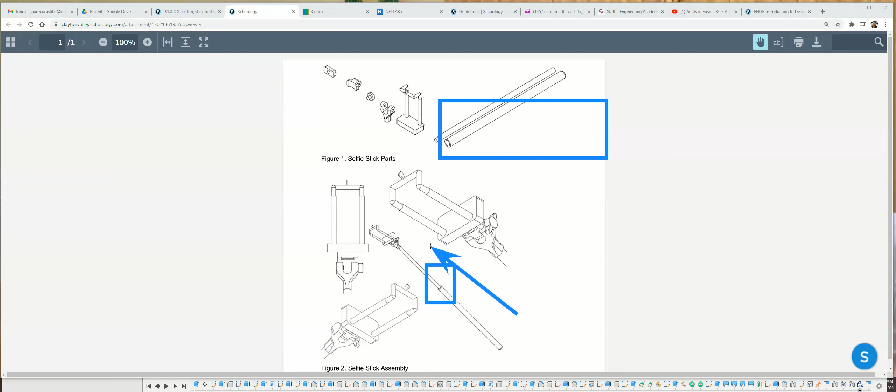Okay, in this video I'm going to show you how to do assignment 2.1.3C. We're going to continue assembling the selfie stick, but this time we're going to assemble the stick top and bottom. We're going to assemble these two parts here, and we're also going to introduce the slider joint where the stick top and bottom will slide. We're going to introduce the slide joint constraint for this assignment. So let's go ahead and get started.

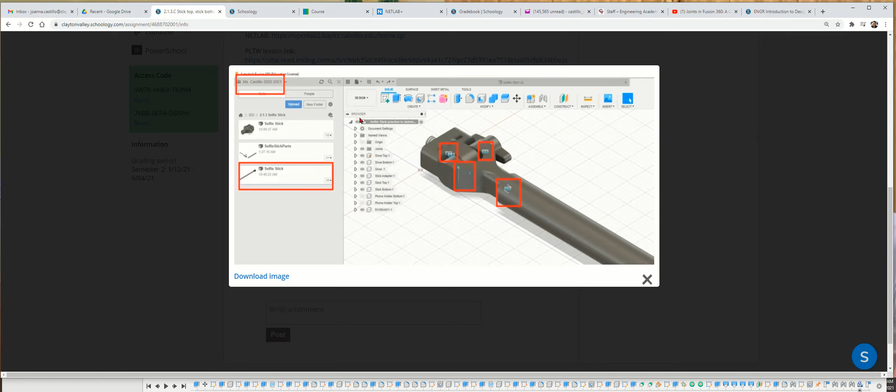There we go, here's the assignment. You're going to screenshot this. I want to see all these joints, right? Here's the slider joint, here's the rigid joint, here's the thumb screw joint, here's the rotate, and here are the two joints for the top, the shoe assembly. I want to see that you saved your selfie stick and I see your name in the data panel. So again, let's go ahead and get started.

So here's our Fusion file. Oh, this is the after picture, this is what we're going to see afterwards. I'm going to click on the one that we're going to continue. So here we are, continuing off on the last one, we just added the thumb screw and then rotated the stick adapter up flat on the plane, 90 degrees this way.

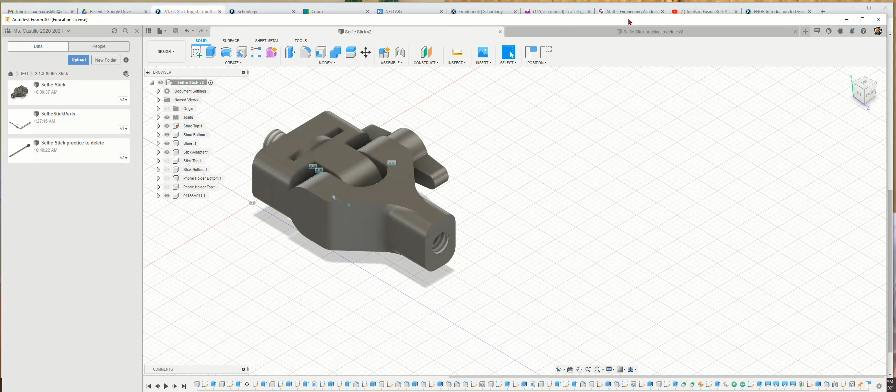So now we're going to go ahead and add the stick bottom and stick top. I'm going to go ahead and show it. Click on the eye, go back in, where are they? There, let's bring it a little closer. All right, there you go.

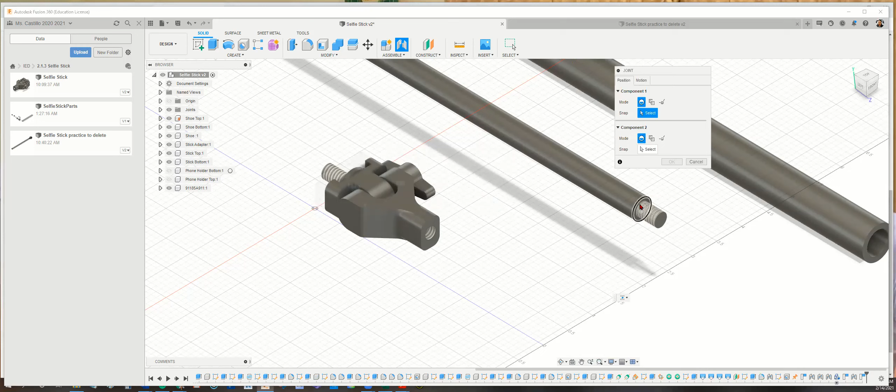Okay, so we're going to go ahead and attach those. Same thing, we're going to attach the stick top, clicking on this face onto the face of the hole of the stick adapter here. So we're going to go from here to here. That's the first thing we're going to do. So again, we're going to go to Assemble, click on Joint, capture position. I'm going to click on the edge right here, and then I'm going to click on the face of the stick adapter right there. Okay, and obviously that's backwards, so I'm going to go ahead and flip, and we're going to click on the motion tab to make it a rigid joint type. All right, so there's the stick adapter top.

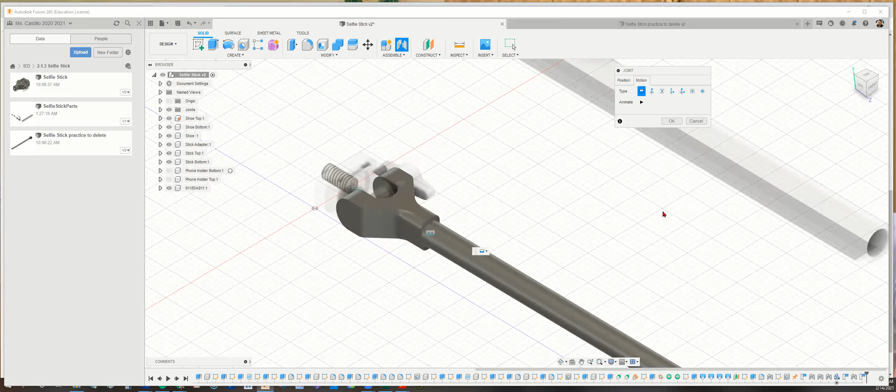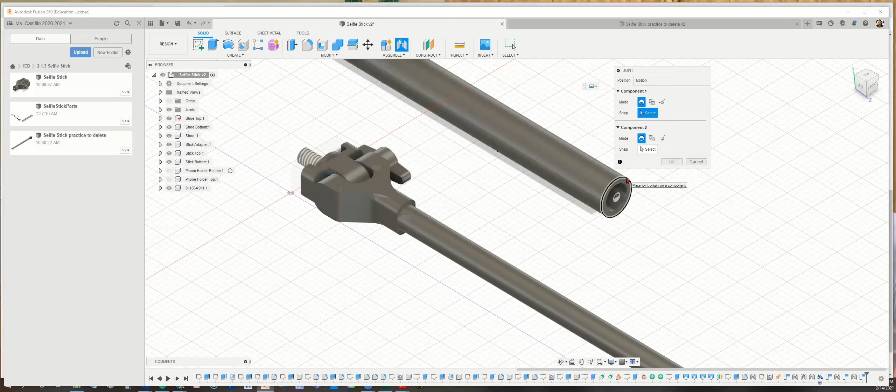Hit okay, so now we're going to go ahead and move the bottom. I'm going to click on this edge here. Let's see, I'll click on this edge here. This one here, let's try both, we have an inside edge and outside edge of the face. We're going to click on this edge here, going onto the edge of the stick top, okay? So again, we're going to go Assemble, hit Joint, capture position. I'm going to click on the edge here, and then look for the edge right there. See that moves? Okay, so obviously it's backwards, so I'm going to hit flip.

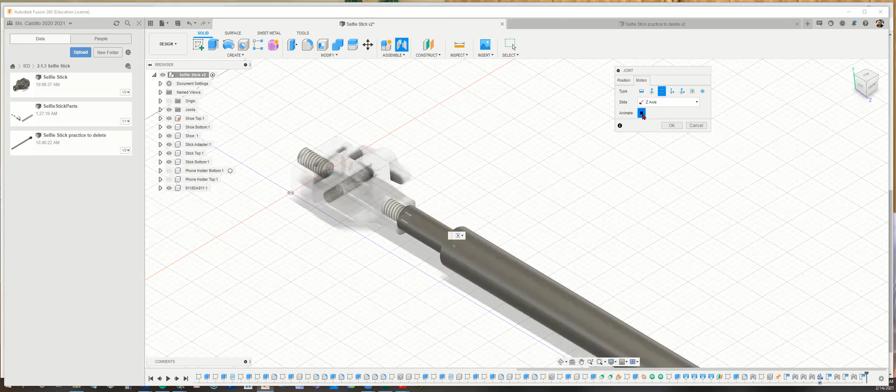And this time I'm going to go to the motion tab and click on the slider joint constraint. See, that's going to go back and forth. If I click on the animate button again, obviously it's not going to go all the way up and down like that, so we're going to go change the joint itself. So I'm going to hit OK.

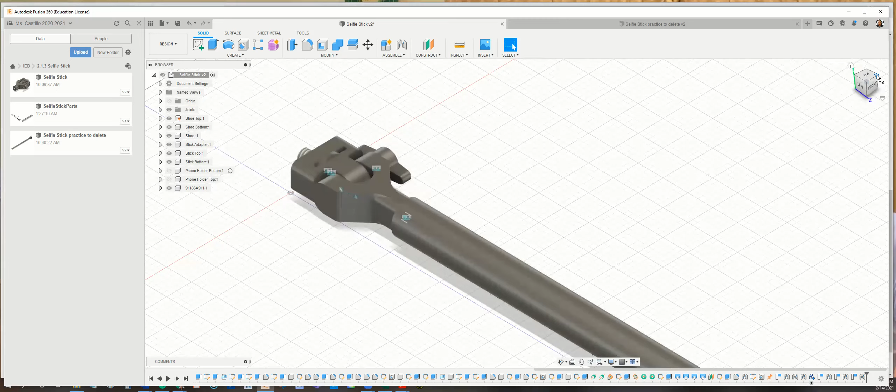So this is what we see so far. I rotate it around to see what it looks like. Looks good so far, everything looks symmetrical. All right, so here I'm going to click on the left side so you can see. We want to move, we want to edit the joint limits, okay?

So if you can see here, just so you can see, we have two joints on here, right? We have the line, we have the two lines, the two lines that go like this is the slider. And then in between that, the Lego tongue and groove one, in between that is the rigid joint. So these are the two joints that are in combination. We have the slider, we just did that, that's going to make it go back and forth.

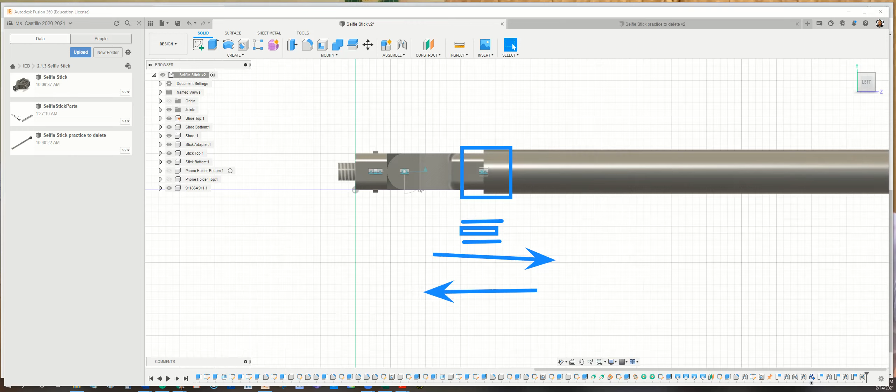And then we also have the rigid joint for the top of the stick top, okay? So we're going to change the joint limits for the slider, all right?

So it's kind of hard to see, so you can either look at it this way. If I click on it, you see the two. What I'm looking for is I'm clicking on the line, not if I click in the center. Let's see, all right, no, that's not what I want to do. I'm going to left click, want to click on the line, make sure it's highlighted.

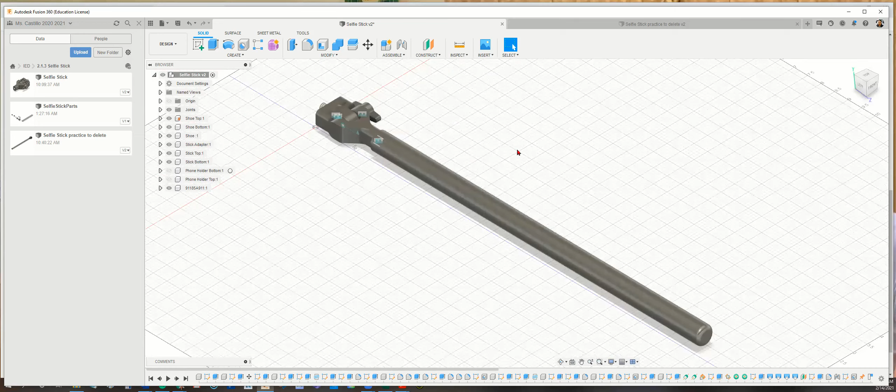So I'm going to click on the line. You can do it from here too. Let's rotate it this way. Okay, let's rotate it this way. And then I'm going to click on the line, see that? And then I'm going to right click and hit edit joint limit.

So what I want to do is adjust the joint limit so it's going to move back and forth. So here's the window. I'm going to click on the minimum, distance, maximum. We're going to check that. We're going to check minimum, we're going to check maximum, and then we're going to check rest.

So the resting position is going to be 0.00 inches. We're going to change the maximum length, the maximum distance is going to go out and the minimum distance is going to go in. Okay, let's start playing with it. I believe we're going to do, let's try 0.10, or negative 0.1, right?

Nope, that's not working either. Let's change this to, okay, so the rest, let's change the rest to 0. And then this one to 0.1, and then this to 0. No, that doesn't look right. Left. Right. So look at it this way. Okay, let's move it this way. So the rest is 0.

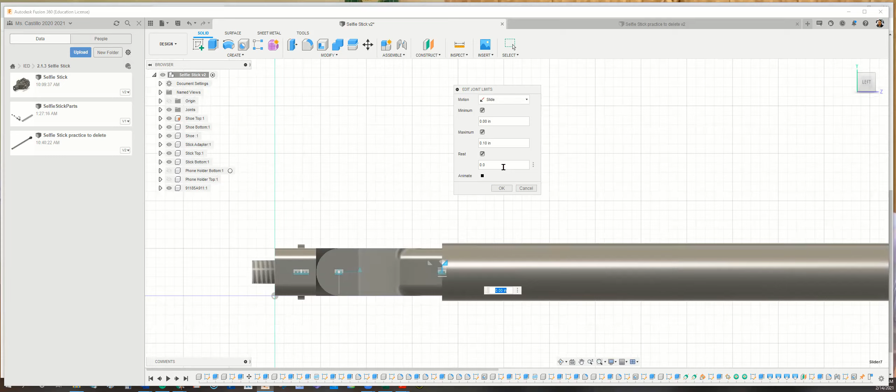Let's animate it. It's not moving much, see? All right, so minimum, let's type in 0.10. Or we're going to do negative 0.1. Negative 10 inches. There we go.

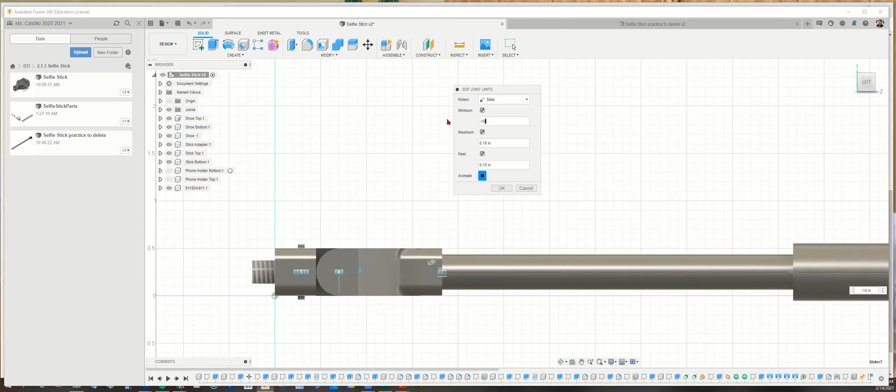That's, we want to do 10 inches. I don't know why I was doing 1/10 of an inch. We want to do 10 inches. Okay, that looks right, doesn't it? Let's look at it this way. Right, it's going out. Yeah, perfect.

So our minimum distance is going to be -10. Our maximum is going to be, let's see, 0. That's the 0 resting position. Maximum is going to be 10. Nope. Maximum is going to be 0.1. No.

So minimum is -10, maximum is 10. Nope. 0.10. Okay, that looks right, 0.10 inches for maximum, -10 for minimum, and rest is 0.

Okay, can you guys see that? Let me look at it again. So minimum, -10. Let's see if we do maximum 0, I guess we can do that too. All right, minimum is 0.10. I'm sorry, minimum is -10, right?

Because the distance is going to be 10, so we're going minus, right? See how it goes back? Back means the -10. Maximum is going to be 0. And then the rest position is going to be 0. Hit OK. All right.

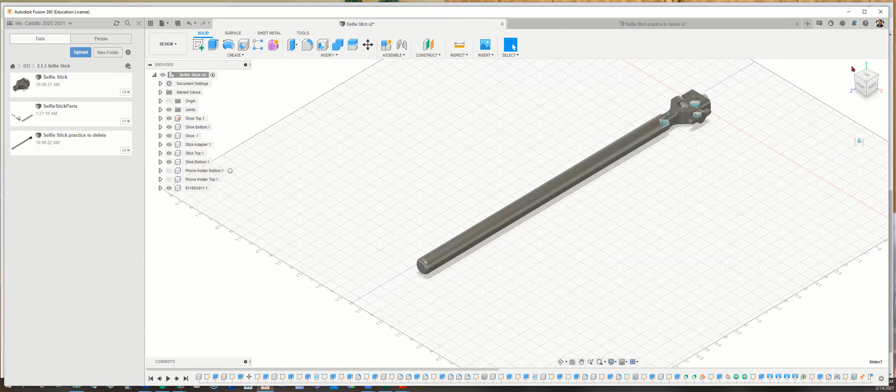So I'm going to click on the default view. So here we can see the joints again. I want you to screenshot this side, click on the top corner and highlight exactly that. So if you want to see the animation again, this is what you're going to screenshot, but let's look at the animation again. I'm going to left click on the lines right there, right click, edit joint limits.

And then here's the window. I'm going to click on the animate button right here. There we go, I can zoom in to see it. Looks perfect. I suppose you can screenshot it midway through, but as long as I can see these joints here, then you're good with the assignment. Okay, so I'm going to hit OK.

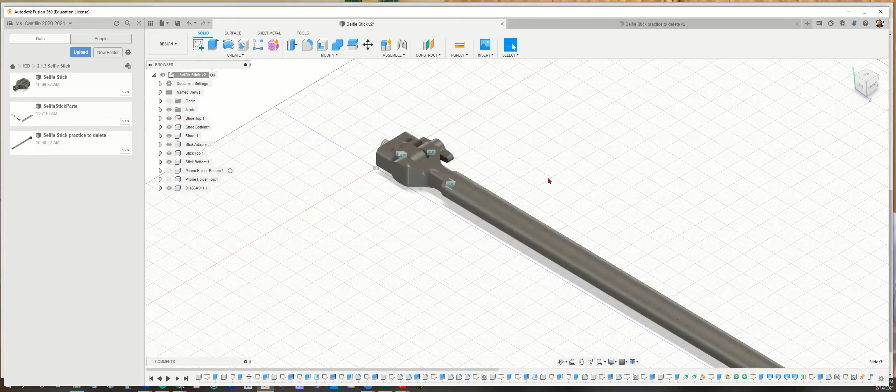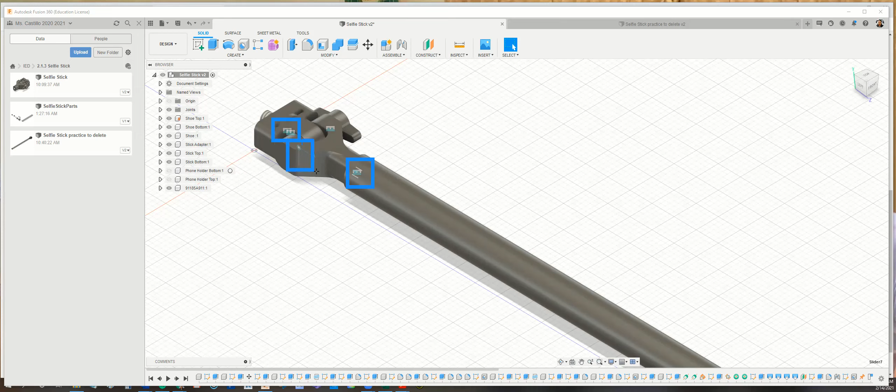All right, so this is the assignment. I want you to go ahead and screenshot this, right? I'm going to see exactly this. This is the main thing that I want to see, but I'm also going to want to see that you have the shoe assembly, we have the rotate for the stick adapter, and then we also have the joint for the thumb screw. Okay, and then also you're going to save it and then screenshot all of this.